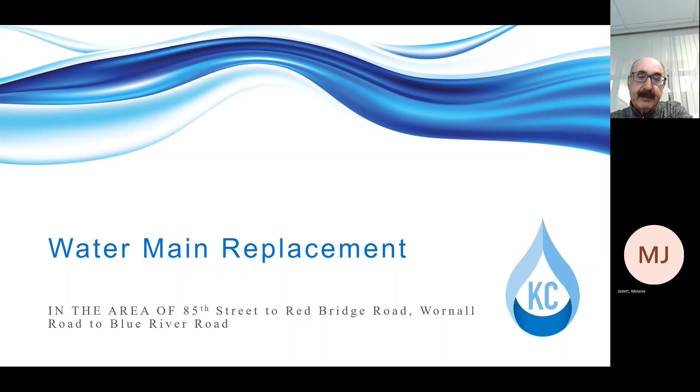This is one of our ongoing water main replacement projects. At present you can see our project team: Mr. Jeff Martin, utility officer overseeing the engineering section; Miss Melanie Jollett, the distribution division manager; Reza Zunuz with KCMO, the project manager; Patrick Lewis, the resident inspector; and Heather Smith from Infrastructure Solutions, who will be project manager overseeing the construction side of the project.

If you see, I displayed a map on the screen showing the location of the project. The majority of the project is going to be along Holmes Road, and as you notice, our project boundary is between 85th to Red Bridge Road and Wornall through Blue River Road.

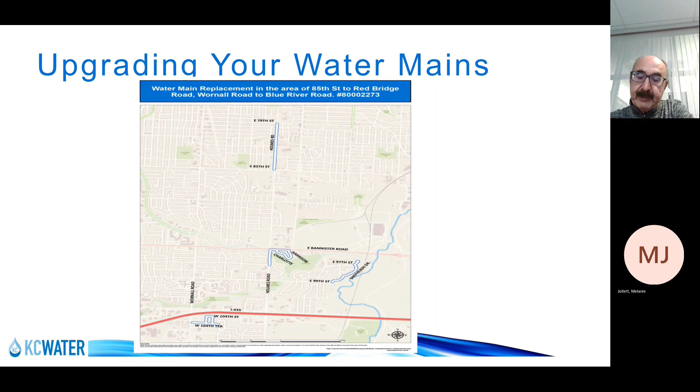There are 4 areas we are concentrating on for this project. This project is going to start on December 22 and is going to finish almost in March of 24. The length of the project is 360 days for substantial completion date, and we add 60 days to it, so it's going to carry us to March 24.

Meanwhile, anytime at any location of the project when we start, the contractor is going to provide hangers and a letter to the people that are going to be affected by this project.

The schedule and logistics for this project, as I mentioned, our starting date is going to be December 22, and we will be sending postcards individually to the people who are going to be affected by the project. There's also a website for the project.

Everybody's name in this project is listed, who you need to contact. Heather Smith is a project manager, Patrick Lewis is the resident inspector, and I'm the project manager. Please call us or email us and we'll be glad to help. If there is any question regarding this project, we're here to help everybody.

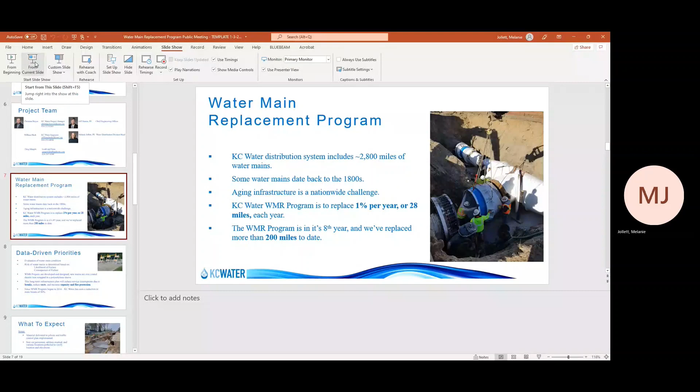The KC Water Distribution System consists of about 2,800 miles of distribution mains. Many of our mains date back to the 1800s, meaning we have some old infrastructure within our system. Aging infrastructure is a nationwide challenge, not unique to Kansas City. However, unique to Kansas City is that we have developed a water main replacement program to address our aging infrastructure.

The goal of our program is to replace 1% of our system every year. This equates to 28 miles of distribution main replaced every single year. The water main replacement program was developed in 2014, and to date we've replaced more than 200 miles.

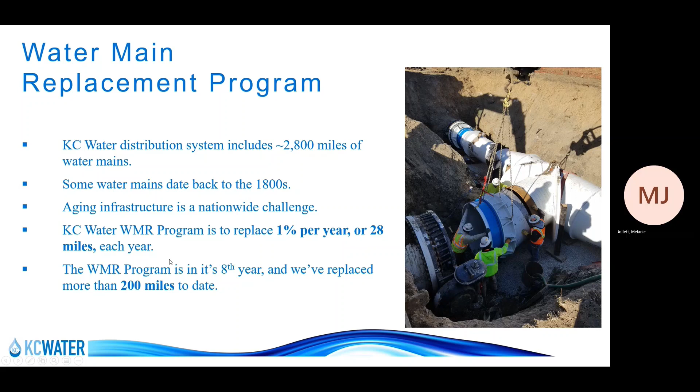To prioritize water mains to be included in the water main replacement program every year, KC Water goes through an in-depth evaluation of our existing water main condition. We have developed likelihood and consequence of failure criteria that is evaluated on each segment within the system. These criteria include items such as age of pipe, material of pipe, break history, or other criteria we've identified.

Once the likelihood and consequence of failure are identified, risk is calculated for each segment. Design projects are developed to include 28 miles of the highest risk mains, and all of the new mains are designed to be zinc-coated ductile iron pipe wrapped in a polyethylene sleeve. This provides for a 100-year design life for the new mains. This long-term plan significantly reduces service interruptions to our customers, meaning breaks are reduced, maintenance costs are reduced, and capacity and fire protection is improved.

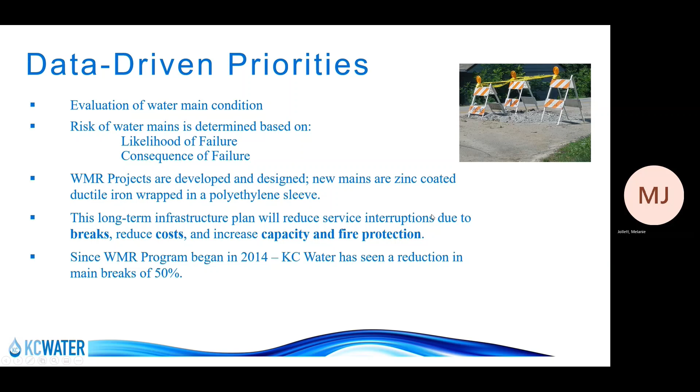What to expect during construction? The first thing that will happen is the setup from the contractor. Once the notice to proceed is issued, that gives them the go-ahead to start delivering materials and begin pre-construction tasks. After the notice to proceed, expect to see the contractor deliver material to the site, pull their permits, and implement traffic control. Additionally, they'll complete pre-construction photos and locate the existing utilities. You might see saw cuts on pavements, potholes in the streets, or spray paint on surfaces.

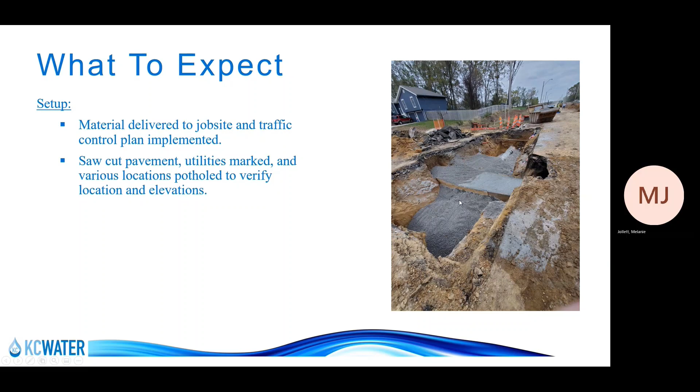After the setup is complete, we'll get into the actual construction of the water main. When the contractor begins construction, they will excavate a narrow trench to install the new water main along the project limits and will construct a temporary connection to tie the new main into the existing water main. This will allow for testing and disinfection of the new main.

The testing and disinfection can take a week or longer, so during this time it's likely that the contractor will leave this site and move on to a different segment to be replaced. Once the disinfection is complete and the water main has passed the testing requirements, the contractor will come back on site and continue with construction.

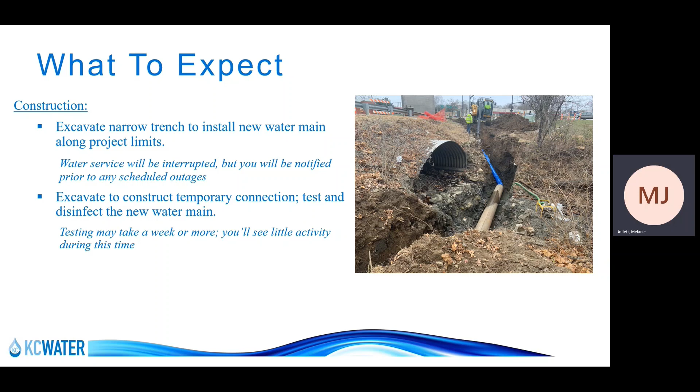With both the new and old water mains in service, the contractor will start transferring customer services. After the services are transferred, he will connect the permanent connection to the existing water main. During this project, we plan to have 3 scheduled outages as part of this construction. These outages include the temporary connection of the new main to the existing main, the transfer of service connections, and the permanent connection of the new main to the existing main.

For these planned outages, the contractor will notify each customer a minimum of 48 hours prior to the outage. There is also potential for unplanned outages due to circumstances out of the contractor's control. For these outages, the contractor will not be able to notify customers ahead of time, but they will work to resolve the outage as quickly as possible.

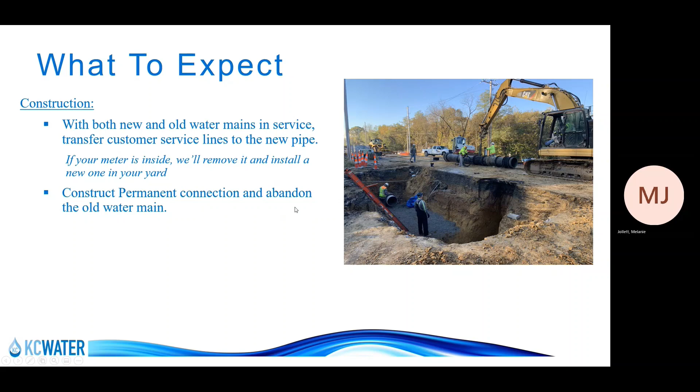Finally, the contractor will be responsible for restoration of the project site. The contractor is responsible for restoring all disturbed areas back to pre-construction conditions. All affected curbs, driveways, and other pavement will be restored per our public works standards, and disturbed established lawns will be restored as well. The lawn restoration will be scheduled as seasons allow.

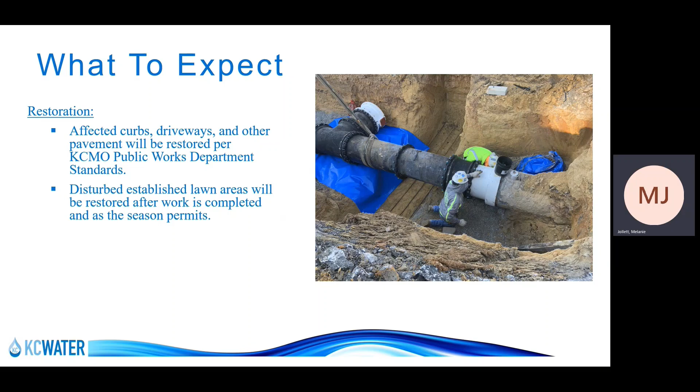Keep in mind that during construction, there will be large equipment in use. This will create noise and dusty conditions. While the contractor will do their best to do dust mitigation, there will still be dusty conditions during construction. Ordinary travel routes might also be temporarily restricted, and the new water main will increase the level of service KC Water is able to provide to our customers.